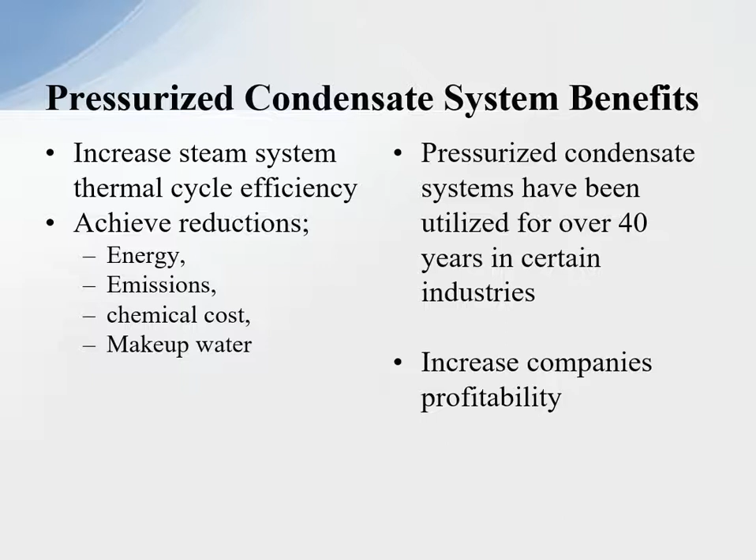Not all steam plants or steam applications can implement a pressurized return system. The first step on implementation is always having a complete steam balance of the system, meaning one or two prints showing the total steam system. A proper preliminary assessment, design review, and knowledge of the application are necessary to ensure a successful pressurized system. Unfortunately, there's a number of pressurized systems out there that are not successful.

This happened to be an example of a food processing company, and we found that certain applications could utilize a pressurized system. Therefore, we implemented a pressurized return system back to the deaerator operation and reduced 6,200 pounds per hour off the boiler load, which, at the average cost of $7.50 per 1,000 pounds, was a substantial energy reduction for the plant.

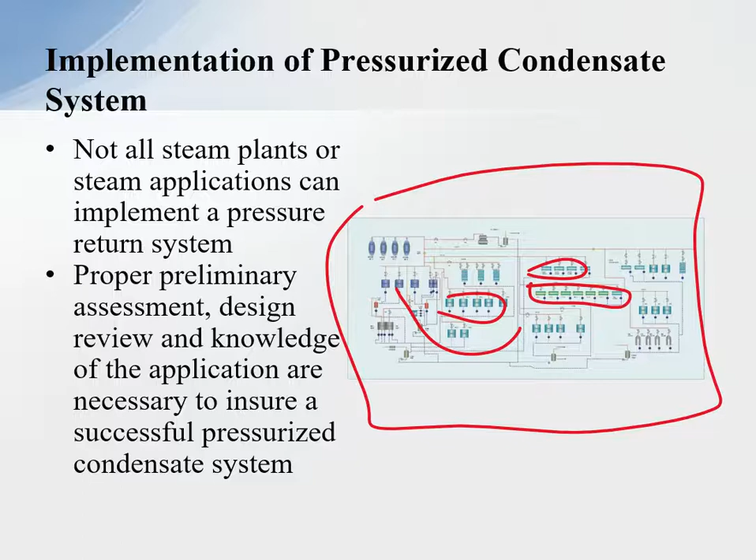An efficient pressurized system will be a condensate return system that's controlled to a pressure as close to the boiler operating pressure as possible. In a perfect steam system, for example, operating at 150 psi, I could have the return system operating at 149 psi, because during phase change, latent energy is given up to the process. There's no pressure drop. Unfortunately, a 1 psi differential across the drain devices would make them very large, and that's not economically feasible.

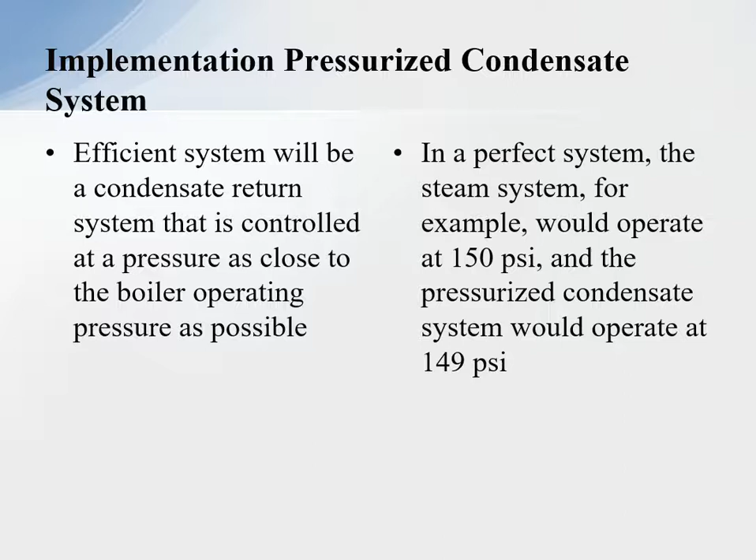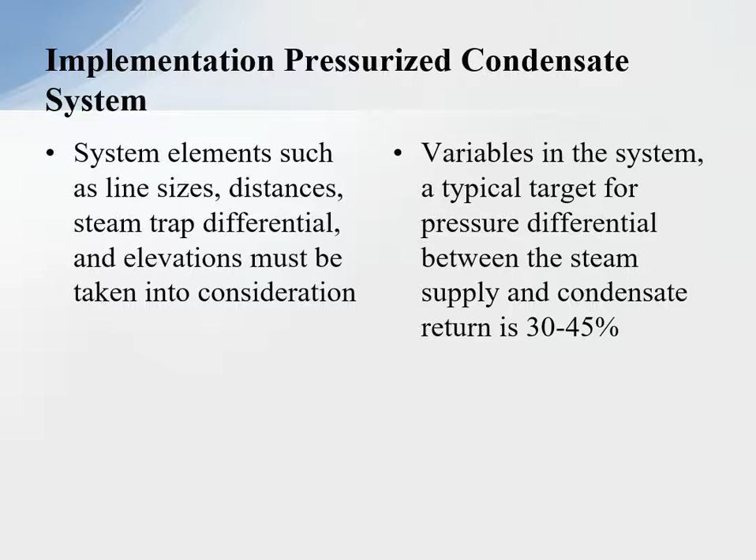So we have to have a differential pressure, and we look at the dynamics of the process to come up with it. System elements such as line size, distance, steam trap differential, and elevations all must be taken into consideration and calculated out. A typical target for the differential between the steam supply pressure and the condensate return line pressure is about 30 to 45%. So for a 100 psi system, we'd be running 30 to 45 psi in the condensate return line. That would probably be our target.

What processes can implement a pressurized condensate system? Just a few: paper machines, corrugators, press operations for all types of industries, tire, particle board, veneers, plastic, and the list goes on. And rotating dryers for all types of industries, for grain drying, meal type drying systems,

and plastic drying systems. And high temperature processes operating above 290 degrees Fahrenheit can implement a pressurized return system, such as steam tracing and reboilers. I can go on with more applications, but this is to give you an idea of the processes that can implement a pressurized system.

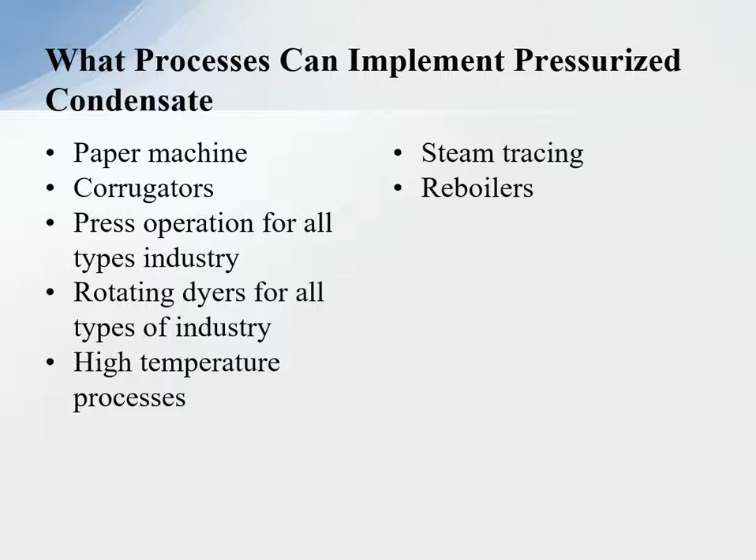On the pressurized condensate system, a very simple point I make in talking to plants about pressurized systems is that P4, the inlet to the drain device, whether a control valve or a steam trap, always has to be higher than P5. It's a simple statement, but I explain to people, as long as P4 is greater than P5, that's great. The problem we run into is when P5 is greater than P4, and then the system's not going to work. The process is going to suffer, and you can get water hammer and a number of other issues. So

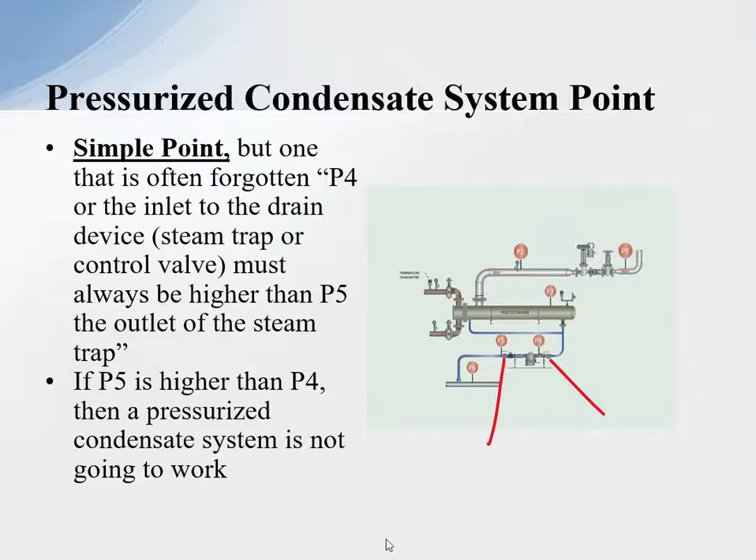We go back to: okay, we've seen all the cost benefits of the pressurized system, and now what's it going to cost me to implement it? We have to understand what components are needed for implementation. The simplest systems require no additional equipment, just piping changes. We did a project in Indonesia, an extremely large facility. We just made piping changes. There were no components added, and the first year savings was in excess of $2 million a year,

which was a very large system. The system requires a receiving tank, flash tank, pressurized condensate tank, or a deaerator to receive the condensate coming back at pressure. Most deaerators are rated at 50 psi, and a deaerator doesn't have to operate at 8 psi. It can operate at 30 or 40 psi. We have deaerators operating at 150 psi. What I'm saying is, a lot of the time the components to receive the pressurized condensate already exist, so it's a matter of just piping changes, which really lowers our implementation costs.

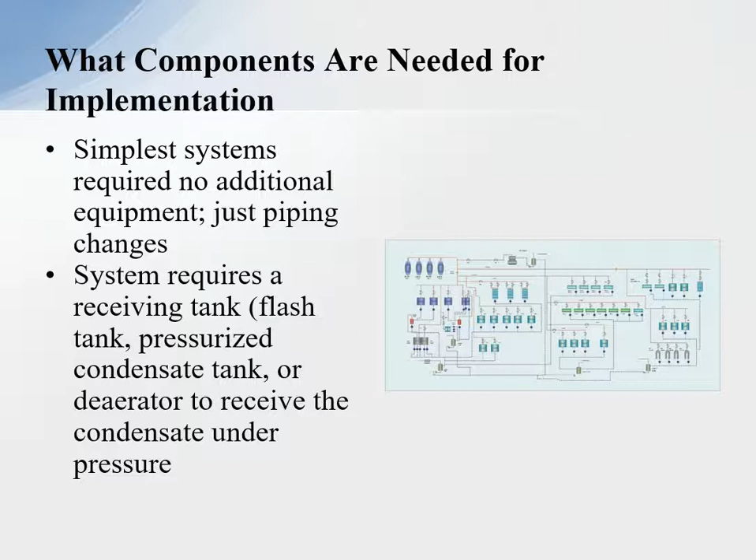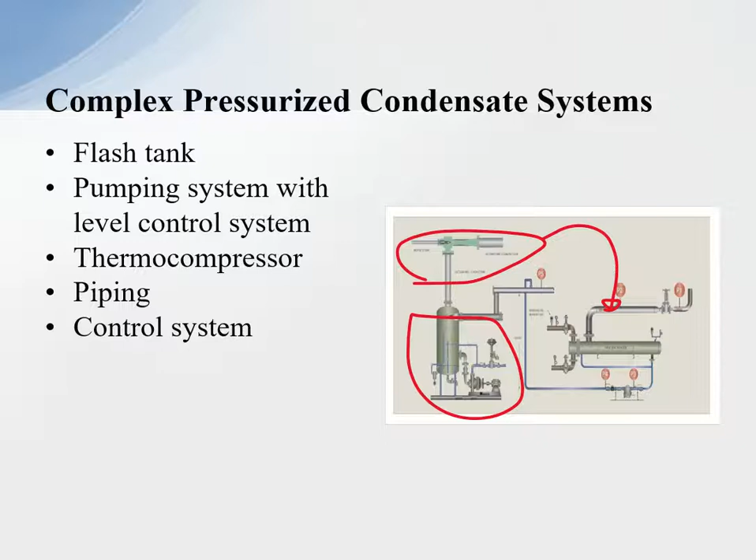The last thing: how do I get started? I want to reduce energy and increase the company's profitability. How do I get started? Understand the current system, roadmap the changes, implement the changes, and last, document the success of the program. That's always a critical thing, documenting the success of the program. So we have documentation, we know how much we save, and we can take that to management and say, this is our savings, and that becomes a very successful program.